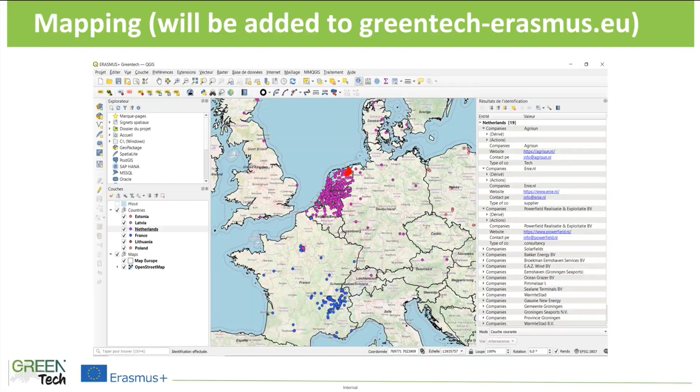It's a byproduct. The other byproduct is the survey and interviews we did. I haven't introduced myself, I just noticed. My name is Eric Keppels. I'm from KBA Nijmegen. We are a research institute in the field of education and labor markets, and I'm a senior researcher. I've worked there for 15 years now. You can look at our website for more information. It's a bit outdated, but it will also be updated this year.

Why did we want to do a survey and interviews? Well, we believe when you create content for education, you have to have a strong link with the industrial actors. So that's why we wanted to ask, what kind of needs do you have? And also take into account, because that's one thing we realized during our first phase, that we're dealing with 5 countries, but everything we create, we want to disseminate to all possible EU countries. And there are big differences in educational systems and also in the way the labor market works, so we needed more information about that.

We also had some first ideas about the content of the 6 modules we want to create, and we wanted to ask people: what do you think of it? Is it usable? Is it suitable for different types of workers? Is it suitable for different levels of education? What are your thoughts? Give us some information, give us some feedback on that.

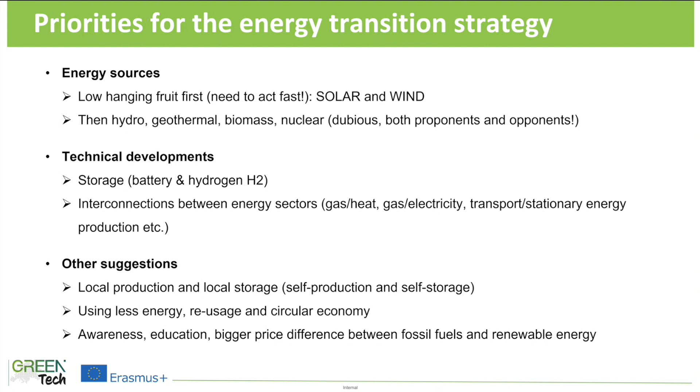What is the most important challenge to overcome? We also asked this in the survey. There are all kinds of challenges, but what's most striking is that people mostly didn't say it's necessarily financial, technological, or behavioral - it's mostly strategical, governmental. So I thought, well, that means we can do it. If it's just something that needs to change by government, we can do it. But then all our respondents said, well, there's a little bit more to it. There are lots of hurdles left in execution.

Even now that the war is going on in Ukraine, prices are going up. We know we have to do something. A lot of people and governments know that we have to do something, but there are still lots of hurdles left in execution with all kinds of procedures and permit granting, etc. That's one big hurdle. The other big hurdle is labor challenges, as already said by Annabelle. It's not just a shortage of technical staff, it's also a need for proper training because the technologies are changing so fast.

And what kind of skills and competence are needed? We asked this really broadly. It's mainly practical and theoretical, precisely because the technologies are changing so fast. So we need to know what the possibilities are between the different energy sectors, what kind of interconnections can be made, how we can profit from it, and how to apply it and interconnect it.

And the inventory matrix, that's the spreadsheet that I showed to you earlier. That's this one. I can share it with you in detail to show what we actually tried to, in depth, get to some agreement or understanding of what everybody was teaching. Well, we thought that this is not the way forward.

So then she said, well, I'll try to explain to you. It's an idea that she had for many years actually, what these notes, what it should be and how you could use them. And if you look at it from a slightly different angle, these notes are actually a dissemination tool or activity.

So if you have done research, maybe in the PhD or in the master stage, you should be able to really summarize or answer with the knowledge that you've gained in that master year or the PhD stage. You should be able to reflect on the things that you've learned and to really summarize that in a brief, very dense article which answers one particular question, actually, if it can. And if you answer too many questions, then you should split it up in different notes. And then you have very small building blocks in a way.

You can have knowledge-related notes, application-related notes, or implementation-related notes, because you have different types of projects, like project-based learning in your university, or the CDIO initiative - the MIT educational engineering approach with conceive, design, implement, and operate stages. You have to learn quite a lot of these aspects.

And this was her idea of how to get used to that. You can say a note is for basic, more advanced, or expert level, so you can have different levels of complexity in these notes. Something useful for a bachelor's degree might not be of interest at all to somebody at a higher level.

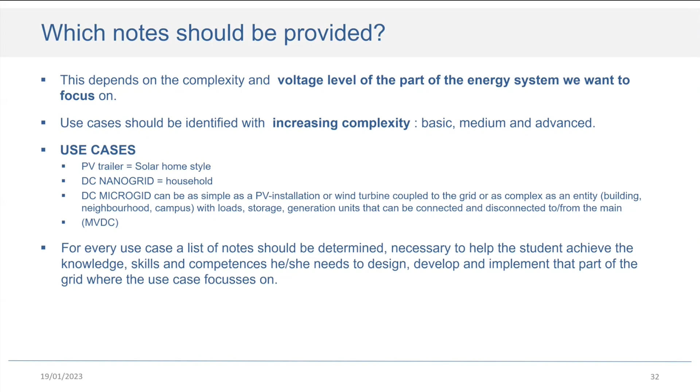And then additionally, we said, well, if you have these notes, how do you then get to a way where not only staff, but also students actually can have access to these learning materials?

The idea is the owners want some control of the content that they generated. So there's a platform where there are individual spaces controlled by the owners, the authors of these materials. When people want access, they ask entrance to the owner of the materials, and then they can communicate with them directly. Also, if you have questions, you can directly ask the expert, the owner of the materials.

Maybe communicating directly with students of others is something you might not want, but this is something the owner of the materials can indicate.

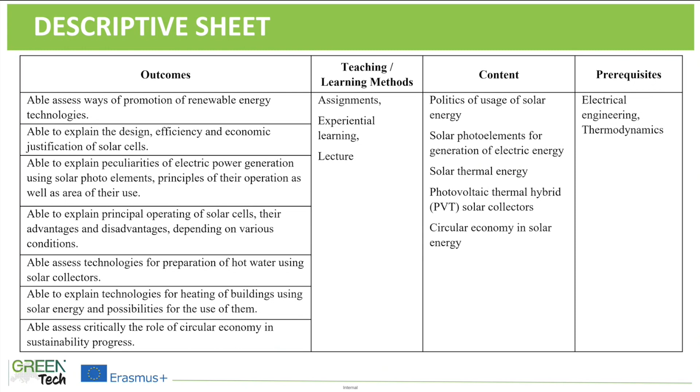Of course, the descriptive sheet is understandable more for the teachers, because you are preparing study programs every time. So it's helping us too, to have a better understanding of this module.

Of course, like Eric presented, we did the interview. We have surveys and interviews together. Of course, we didn't collect a lot of answers, but Remigijus spoke with some outside companies, and we got some responses about that.

Our module content is PV module systems, which contains fabrication of PV modules, series and parallel connections in PV modules, PV module parameters, designing grid-connected PV systems, designing standalone PV systems, installation on roof and on ground, location issues, the position of the sun, irradiance on PV modules, direct and diffuse irradiance, components of PV systems, maximum power point tracking, power electronics, batteries, charge controllers, cables, solar thermal energy basics, solar thermal heating, components of the system, ST system installation, and PVT systems, which is quite new.

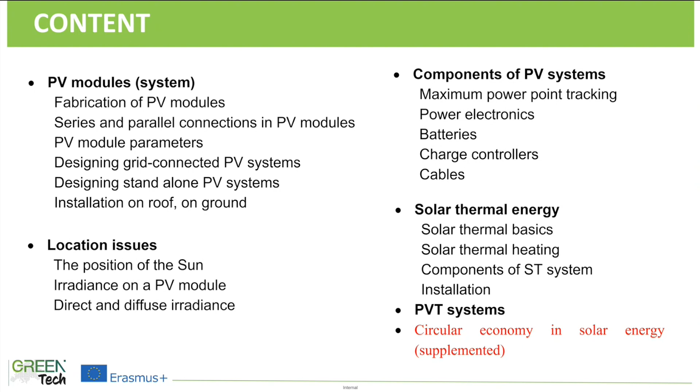We have comments from our partners that maybe we need to think about or cancel this description in PV module. We added circular economy in solar energy. From the interview report we got content suggestions which we will add to the module, because at this moment it's only in pilot module preparation. We will correct the module based on all suggestions, and after that send it to all our partners so they can read it one more time, and by those corrections we have to prepare a perfect module to use for students.

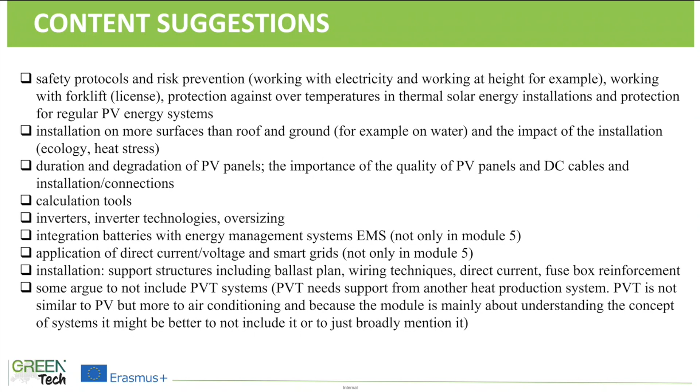Content suggestions include safety protocols and risk prevention, working with forklifts, protection against over temperature in thermal solar energy installation, and protection for regular PV energy systems, installation on more surfaces than roof and ground, for example on water, and the impact of installation duration and degradation on PV panels, the importance of quality of PV panels, DC cables and installation connections, calculation tools, inverter technologies, oversizing, integration of batteries with energy management systems, application of direct current voltage and smart grids, installation support and structures including ballast plan, wiring techniques, direct current, fuse box reinforcement, similar to PV but more related to air conditioning. Because the module is mainly about understanding the concept of the system, it might be better not to include that in depth, just broadly mention it.

As we mentioned, we are the lead partner, so we prepared this module and sent it to the colleagues to check it. We already collected feedback from our partners, so during a few months we will prepare and correct this module according to our partners' suggestions. Then we will send it to them one more time to read, or maybe they will find more things to change. So until the end of July we need to have the final version of our module M1 prepared. Thank you for your attention.

Okay, just let me see. And arrive until here. Because I'm super nervous, so okay.

Good morning, let me introduce myself. My name is Gregorio Blanco, I'm from Valencia in Spain. Maybe you know Spain from Mallorca or Barcelona, but there are more cities, and one of them is Valencia. I'm from a vet school, the name of the school is Chabek. I wear the uniform.

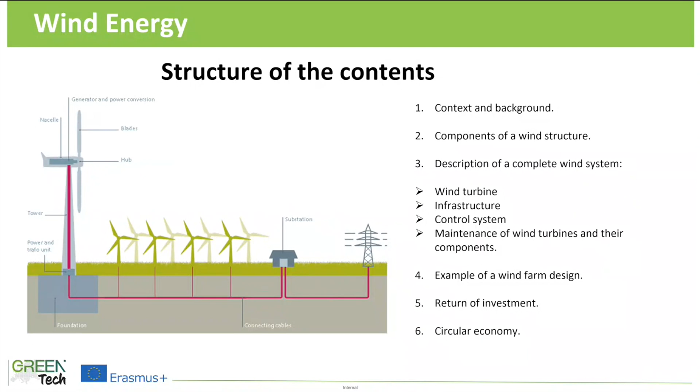What have we done? The first thing we did was contact students or former students who are working now in companies. Perhaps you know Acciona, perhaps you know Siemens Gamesa. We have a lot of mechatronic students working there.

We said, okay, we have a problem, we have a challenge, and we need your help. And then they gave us a lot of materials focusing on maintenance. We got a lot of maintenance operation information from different companies.

We also contacted some teachers from other schools in the area of renewable energy. We studied manuals from different subjects in technical study, and also at university. We contacted some companies, did autonomous investigation, and also used WindEurope, number 7. This website is impressive, and they also have LinkedIn where they upload a lot of things every day, which I think is super interesting.

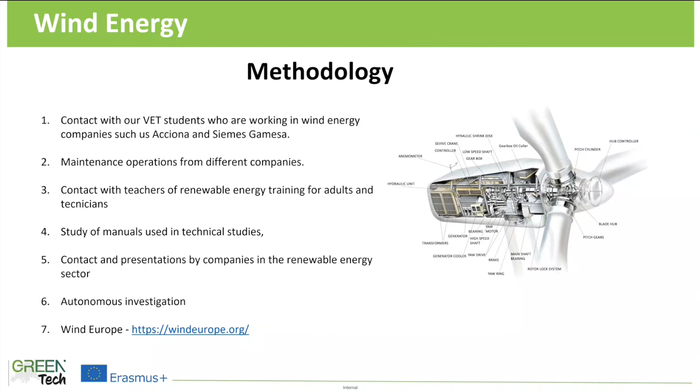Some background: at the end, 15% of the electricity demand in the European Union is covered by wind energy. The best countries are UK, Sweden, Germany. In 5th place appears the Netherlands, also France. And Spain is not there, but it will appear later.

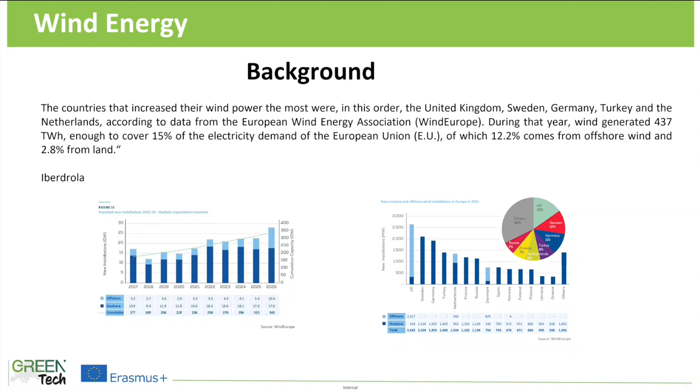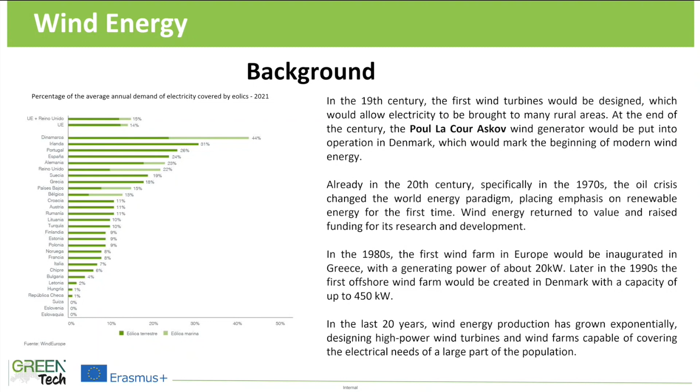And now Spain appears in a better position than before in terms of energy covered by wind power. We were in a meeting last week with Siemens Gamesa, because as a technical school we are really focusing on employment, and Juan Carlos Morón is in charge of the employment agency.

Maybe if you were there, you can understand why safety is important. I'm not going to go deeper here, because we just take all the components, and in our module we describe all of them. That's descriptive, so I'm not going to spend much time on it now.

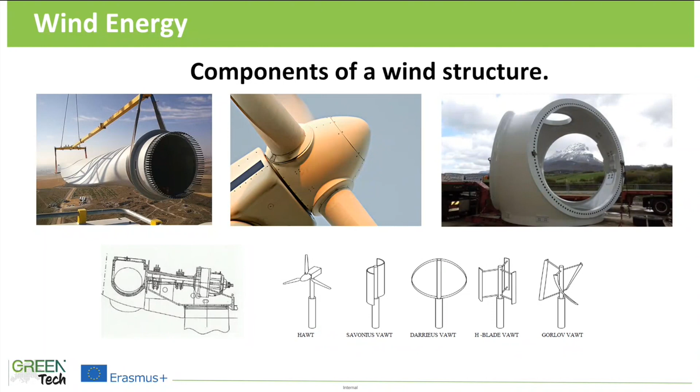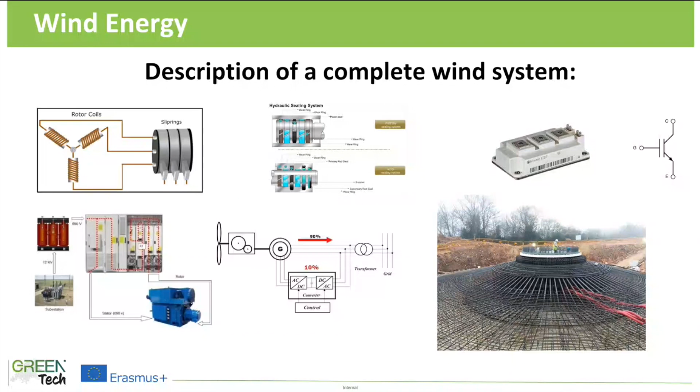We've also included a description of the wind system - that's quite theoretical. In the school we focus on vet, on technicians, but also on higher education, levels 4, 5, and 6. So thinking of levels 3, 4, 5, we'll talk about the maintenance of wind turbines.

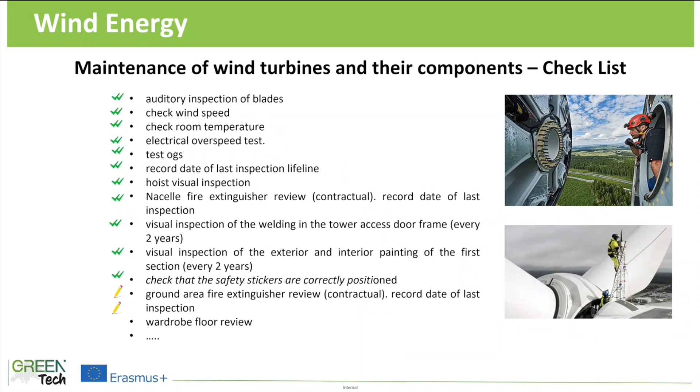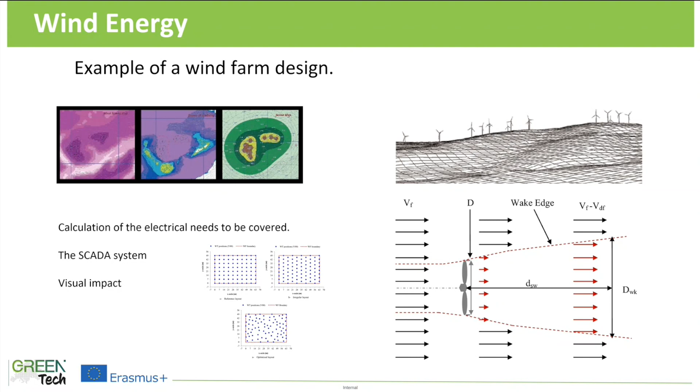There's also a checklist, not relevant in detail, but part of our module focuses on technicians who need to do the maintenance. Our second focus is engineers - we think about wind farm design, visual impact, how to use the SCADA system, how to monitor online, how to use online tools. So the idea is that we've developed the module with two different focuses.

Digital tools is something I mentioned in the previous slide. We also have parts on protective equipment and electrical failing - I mean, all of this you can read by yourself, but you can understand that safety, of course, is something super important.

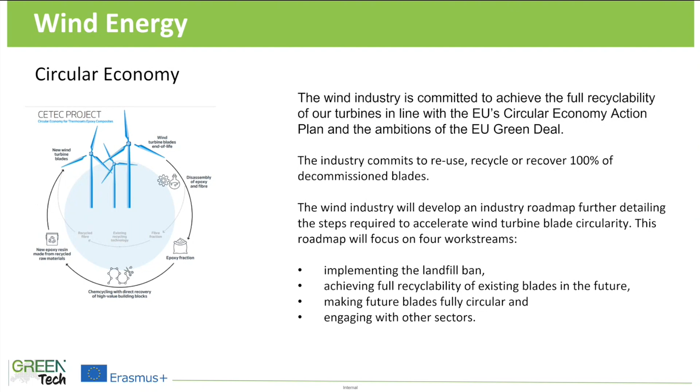Thinking about the circular economy, that's from the WindEurope website - this commitment to achieve full recyclability of our turbines. I think that's an interesting point. I can tell a story about it, but I can do that later. The idea is that circular economy is part of our presentation.

The idea we have for the contents is to talk through some theory about describing and knowledge of digital tools, knowledge of remote work tools, circular economy, and necessary protective equipment, plus a practical part that covers maintenance, sizing, and designing. I don't know if I disappeared from the screen, sorry.

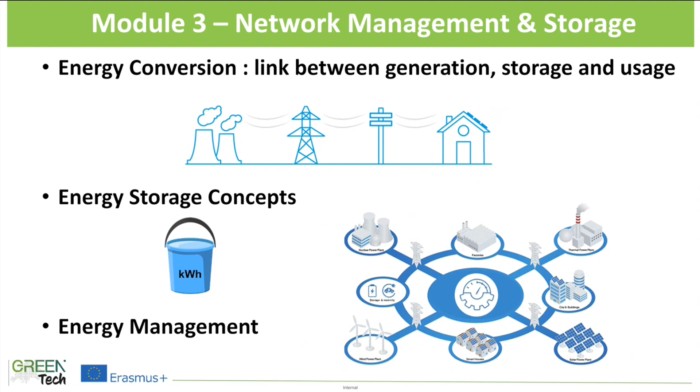To get some more detail for each part, first is the energy conversion. We will start at energy production, because it's relevant where our energy comes from. And we also want to spend some time on classical production plants, like thermal plants.

We know steam turbines, also nuclear plants will be in the module. It's not maybe a good renewable energy source. Should we build more nuclear plants or not? I'm not fond of it. I say, just leave it as it is right now. Don't build any more, and put all your effort into renewable design. But still we have to mention it, because they are there.

Also the combined cycle gas turbines, generating plants with fossil fuels, and combined heat and power, where you have heat generation and also electrical generation. More focus, of course, on the renewable techniques like PV, wind, hydropower systems, and also generation of electricity by hydrogen with fuel cells, a very emergent technology right now.

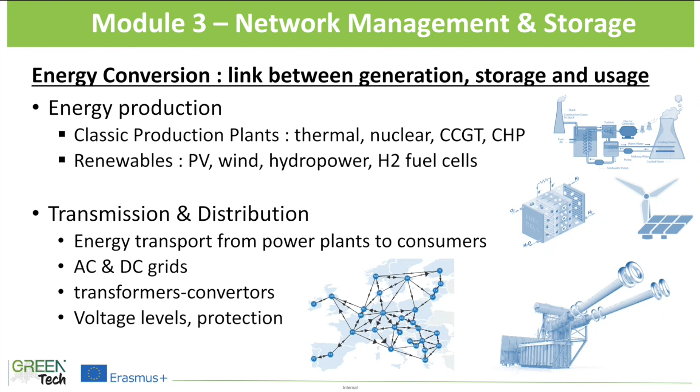The second part, we are going to discuss energy storage concepts. There are a lot of concepts already known today, mature technologies and very new technologies.

Today, electrical storage most of the time is in batteries, lithium ion more specifically, because with the rise of cell phones there was a lot of technology growth in lithium ion technology, and now it's a really mature technology. But there are also other batteries in the field, like salt batteries or flow batteries, maybe for other appliances.

Also take into account the batteries in our electrical vehicles today. We can use the electrical vehicle as a very big storage capacity, and that's called vehicle to grid, but maybe another term is vehicle to X, vehicle to everything.

Another storage concept is water by pumped hydro, also a very mature technology, which can provide a lot of power, maybe the same power as a nuclear plant. It's very helpful in our energy transition.

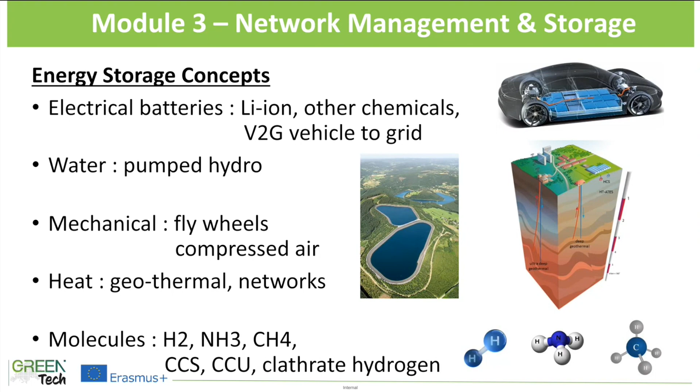The last part is the energy management of all that power and electricity, also involved in the module. First of all, we take into account some grids: the power grid, smart grid, microgrid. What's the difference between them all?

For sure, it must be smart - you must use the energy, generate and use it in a smart way. Some techniques you can use are DSM, demand side management - not just that if you need some energy, let the energy plant do the work. No, just use the available energy that there is. You must manage your own time and capacity.

SCADA systems are also very important for monitoring all the energy flows on our big screens. That's what the TSOs are doing - the system operators are controlling all the flows with SCADA systems.

Then virtual power plants are also upcoming. That's something like, if you have a lot of local energy generation - maybe in the neighborhood battery storage, maybe in the neighborhood a hydro pump system - you can collect them all in a virtual power plant that will act as just one generation plant. It's more like a service that can be offered.

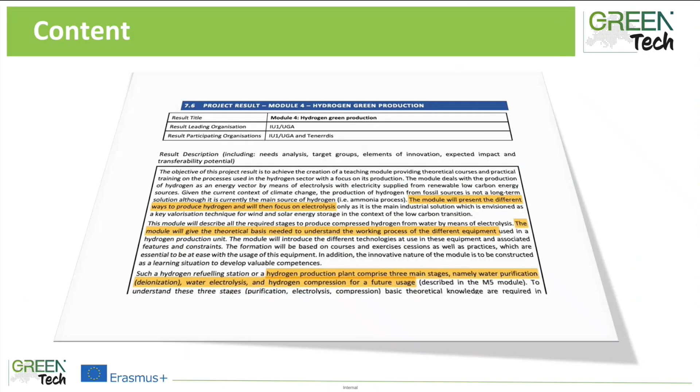So I will focus now on this hydrogen module dedicated to green production. It's a module that I will build in collaboration with Tenerrdis, Philippe Cluzel from Tenerrdis. This module is divided into 7 parts, maybe 7 nodes, because I like very much this idea of nodes. So these different chapters are actually quite independent one from another.

There will be a first part dedicated to a brief overview of hydrogen, its properties, as I will detail later, and also discovery and current usage. Then a second chapter dedicated to the need for green production from water electrolysis. This second chapter will be more theoretical, while the three next chapters are more technological.

First, a water treatment chapter to prepare water for electrolysis, which will be the fourth chapter. Then H2 storage, different strategies. A chapter dedicated to life cycle considerations. And finally, safety rules, which will be a summary of rules introduced in the previous chapters for each part of the system for hydrogen production.

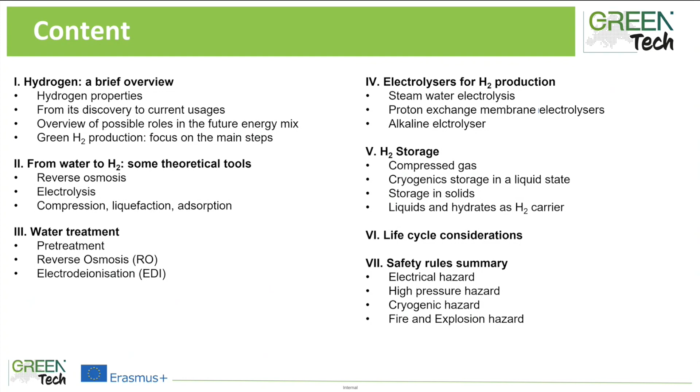And the idea of the next module will be to present a new usage of hydrogen and of energy to rescale, I would say, this current usage of hydrogen. So hydrogen will be a way to store energy and to develop a new usage.

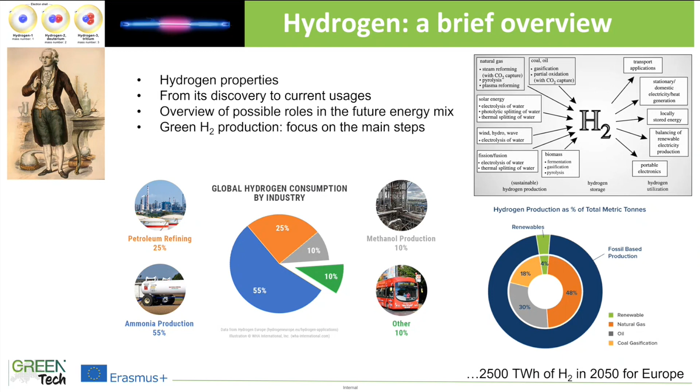So this second chapter dedicated to the building of hydrogen, the generation of hydrogen from water, will introduce theoretical basis. It will be divided into three parts. The first part dedicated to osmosis and reverse osmosis that is needed to purify water before usage within electrolyzers.

This first step will require thermodynamics and transport in porous media to be understood. Then we will go to electrolysis with electrochemistry basis and kinetics limitations during the process. And then we will continue on the different, more advanced ways to store hydrogen, either as a compressed gas or based on liquefaction or adsorption strategy, with the different theoretical tools related to these three types of storage.

So this whole chapter will be more of a level 6 or 7 engineering level, and it will be independent of the next chapter, which is more technologically oriented.

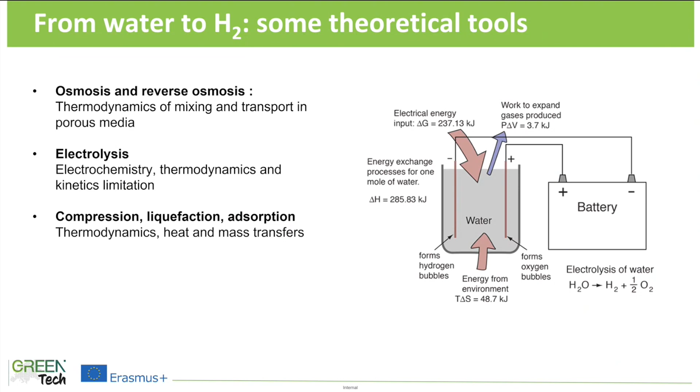So this first technological chapter, chapter 3, is dedicated to water treatment. You can't use water with additives. It needs to be purified before using it in an electrolyzer.

So there are 3 steps. A first pre-treatment stage based on removal of suspended solids, so filtration, and also to remove biological elements.

Then there is a reverse osmosis, which is the main step based on porous fiber with tiny holes, nanometric holes, with different types of membrane, and if needed, ultra high purification, which will be the last part of this module. Then we will go to the fourth chapter dedicated to electrolysis to produce hydrogen.

So here again, we will focus on three main technologies. First technology, which uses steam, water under a steam state, with a different kind of approach based on steam, either solid oxide production, or proton exchange membrane production, or molten carbonate system.

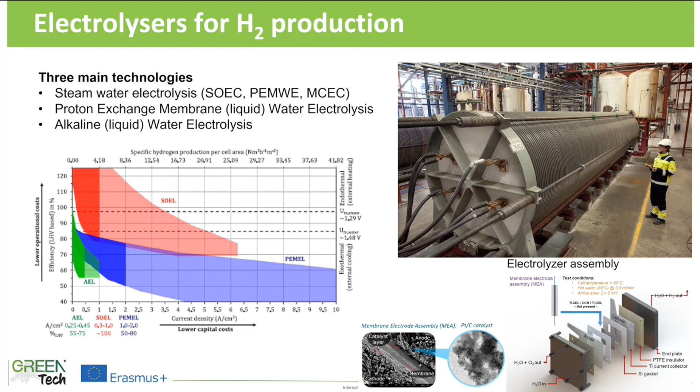So here there is the picture of the proton exchange membrane strategy to produce hydrogen.

So beyond compressed gas strategy, cryogenic storage in a liquid state is also considered, maybe for planes. But this strategy requires a lot of energy to reach a liquid state, so it's a drawback of this second strategy.

There are other strategies, so adsorption or absorption within a solid system, and also storage within other liquids, like ammonia, which is already produced at a large scale, methanol, formic acid, for instance, and also hydrates, as mentioned by Peter.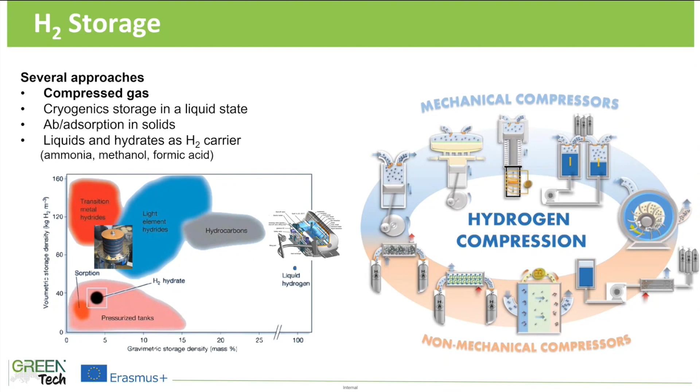There will be a chapter dedicated to life cycle consideration. So here you can't read everything, but what I want to emphasize is the fact that, for example, for proton exchange membrane electrolyzer, actually, what is really important is what we call balance of plant, which is all the auxiliary system required for the system to work.

And in terms of impact, actually, these auxiliary systems are quite important, and it's needed to take them into account.

And based on this, we can find new strategies. For example, here in the hotel, we have a card to access the rooms that is in wood rather than plastic. So at every level, we can somehow shift to new strategies, but analysis is needed before making such a change.

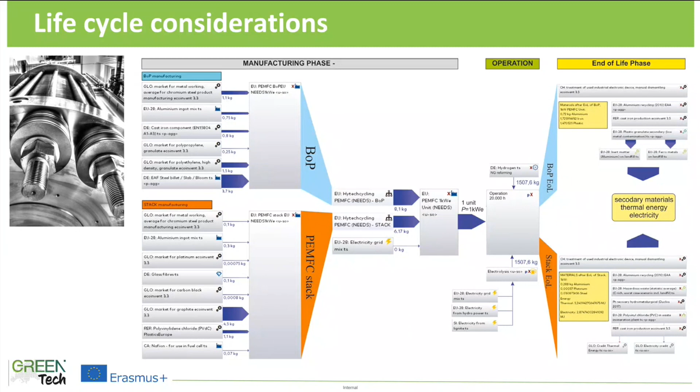So within this formation, it's important that the technician or engineer have in mind what can be changed actually.

To finish, we will have a safety rule summary considering electrical hazard, high pressure hazard, cryogenic hazard, and fire and explosion, which is probably the most obvious. For instance, the fire of hydrogen is not visible, except if you have an infrared camera. So it's something which is particularly specific, not obvious, and dangerous.

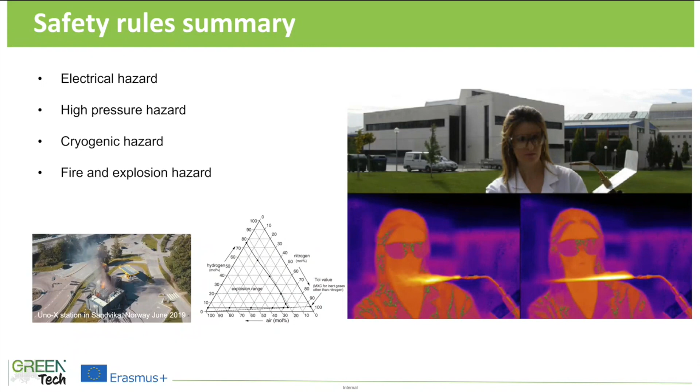So I will move now. Oh yes, I forgot, so just a bit of overview of the organization.

So we plan 12 hours of practical work divided into 3 parts: a part on water filtration, then H2 production and gas compression. We already have these practicals ready in Grenoble, and then lecture plus exercises in a block that will be approximately 10 hours, covering the different concepts I already mentioned.

Here I list the competencies that need to be reached at the end of this module.

I move now to the usage, so the last module: how will we use energy in the future energy mix. I think it's quite difficult to dissociate usage from the energy mix, and this module will be produced in collaboration with the other members of the team.

I plan 5 chapters. First chapter, introduction, presenting the final usage in the global value chain.

Then, to be able to use the energy, there will be a need of electricity or heat production from gas, so we will focus on this cogeneration step. Then we will show different examples of transition where we will move from, for instance, an existing strategy to a new strategy of usage of energy. A chapter then concerning opportunities and constraints, because actually it seems better to go to renewable, for instance, but it's not necessarily easier. So there are constraints.

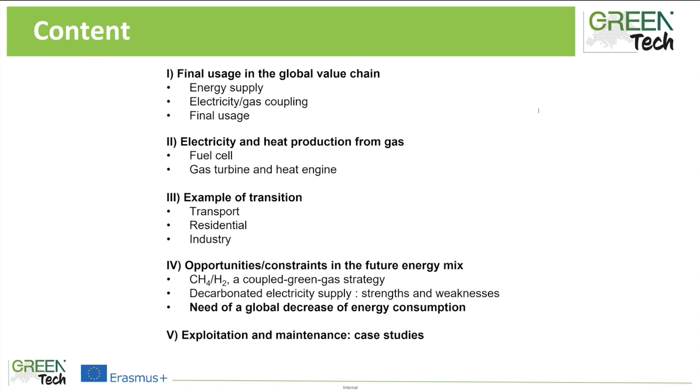And finally, exploitation and maintenance with case studies to cover all the change from production to usage of energy.

So concerning once the energy has been stored, for example, under a gas state, there is a need to recover the energy, and the most efficient way to recover is to make cogeneration, because it's really difficult to produce electricity only. Heat will be produced at the same time, so it's necessary to use the heat that will be produced. And there are 2 main strategies.

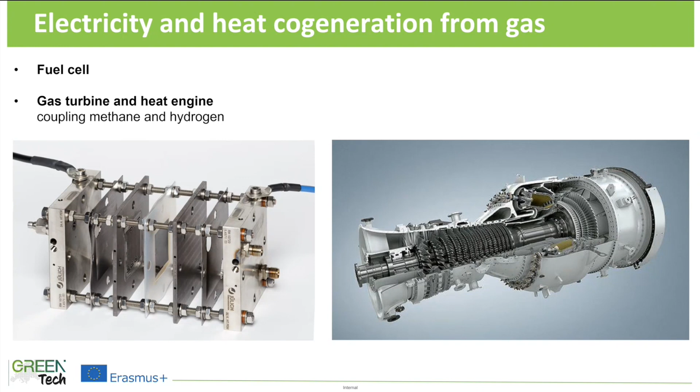Then a chapter dedicated to examples of transition. So maybe the domain which is the most obvious is transport. We will move from heat engine to probably electrical power sources, or maybe hydrogen transport, probably for high load like train or trucks. And for sure, we will need a transition.

Use the changes that will emerge from such a transition, and similarly, in the way we will use energy and also produce energy, there will be changes in residential and industry. Currently, we have local production of energy at the individual house level. We may have a PV and other systems that will emerge that will also be linked to the usage approach.

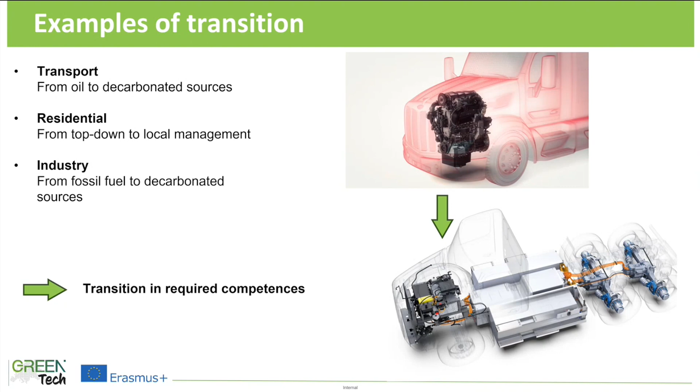So opportunities and constraints in the future energy mix. So I will focus here in this module on the coupling between hydrogen and methane, which is not so trivial. We can imagine complex strategies where we can recover hydrogen from methane. We can imagine to produce methane, combining CO2 from industry with hydrogen, and all these can contribute to new usage.

Peter mentioned carbon production for byproducts. It's also a strategy that is based on this mixing. So this CH4-H2 coupling is very promising.

This decarbonated electricity supply and usage has strengths but also weaknesses. So strength for sure is lower production of carbon dioxide, but weaknesses rely on the fact that most of the sources are intermittent and diluted. I speak about wind and photovoltaics.

So you have a need to store. It's what we describe, but there is also a need to have a peak power that is much larger than the average power. And this is something to have in mind, because you will need to develop a lot of wind turbines. And for solar, this is the same thing. Unfortunately, the sun is not there during the night. So all this to say that there is a need, as it has already been said, of a global decrease of energy consumption if we want to rely only on renewable for all our applications.

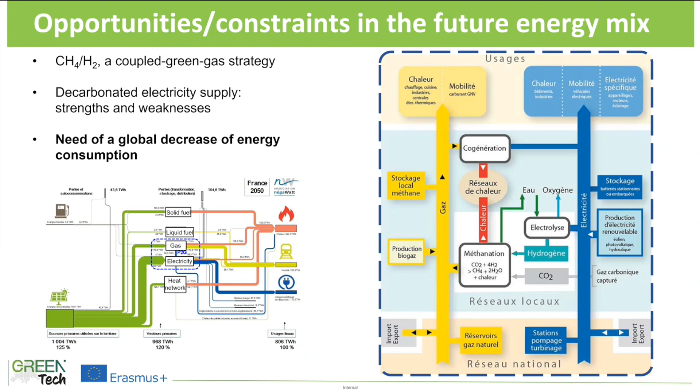This allows me to move to the last chapter. We see here that we need also some adjustment within the team.

The goal with this chapter is to give an overview of the usage of energy, but not only that. I wanted to show all the bricks required up to the usage, emphasizing the jobs related to all these bricks in terms of exploitation and maintenance.